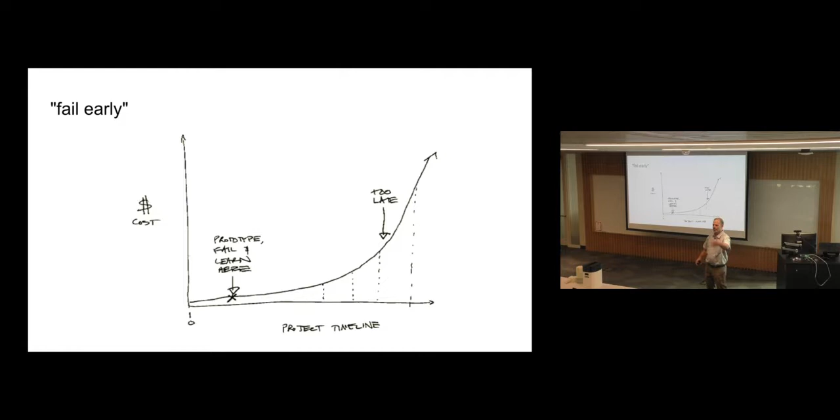It's much more fun to talk about things that don't work than things that do work, at least to begin with. But I don't want you to think that everything I do doesn't work. So I'm going to run through just the names, and you'll see the theme of these 4 companies that I've been involved with.

One of them, which I hope I'll get to a story from, is in the area of image-guided surgery. This was originally called Z-KAT, later Mako Surgical. The idea was how should surgeons and robots interact? Hopefully you'll see this theme over and over again - hopefully not by displacing the surgeon and making a robot surgeon, but rather by bringing the best of both to the activity.

That company was bought in an amazingly large purchase in 2013 by Stryker. Had I stayed involved with that company through thick and thin for like 10 years, I would be on my yacht right now. In fact, there were 5 co-founders of that company. One of them did make a lot of money, isn't on his yacht right now. I was talking to him in preparation for this talk, and he's now able to be his own angel investor. When he has an idea, he can just go do it.

So plenty of money, but only if you really stuck with it. The other 3 of these I did jointly mostly with Ed Colgate, an occasional other. He's the co-founder of the next 3 companies I'm going to tell you about.

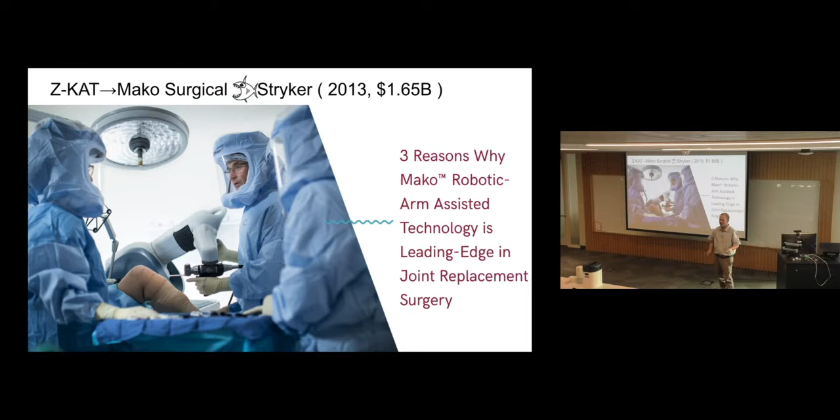Cobotics. Here the idea was similar to integrated surgery, but now it's in manufacturing and assembly, especially in automobile assembly, but other materials handling applications. What's the proper interaction between people and robots there? We found that the people you'd most expect to be fearful of robots, because the robot is supposed to take our job, were not fearful of these cobots, collaborative robots, because they understood the idea was to complement their abilities with robot abilities rather than to try to make autonomous robots that replace them.

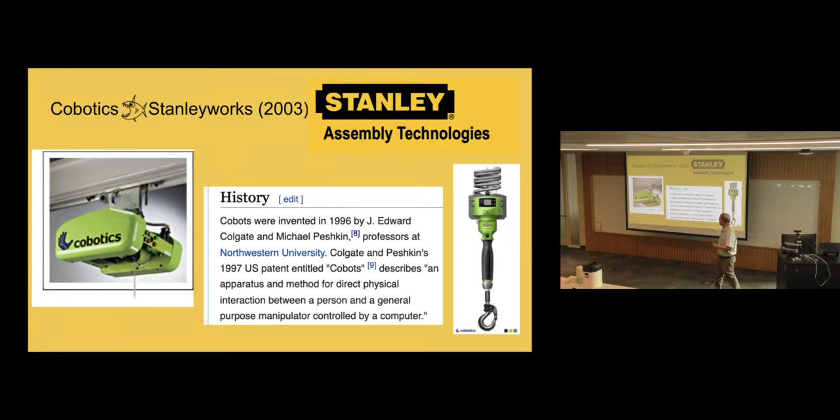Third, and I'll have a story from this one as well, Kinea Design, in the space of rehabilitation robotics. Again, there's a clinician working with a patient, and how do you combine robotics with the skills that a physical therapist brings to a patient rather than trying to do what the physical therapist does?

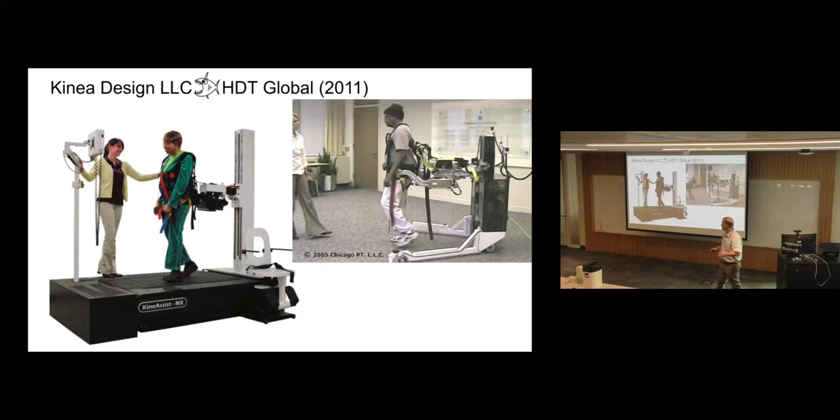Lastly, and this one is current, the only one that has not been gobbled up, is Tanvas. This is not about people and robots, but it still is the physical interaction of people and machines. In this case, how can you spend all day swiping touchscreens? Why can't you get anything back from that touchscreen besides an occasional buzz? Why can't you feel real textures and structures on that touchscreen?

So now I'm going to hand this over to David to introduce himself.

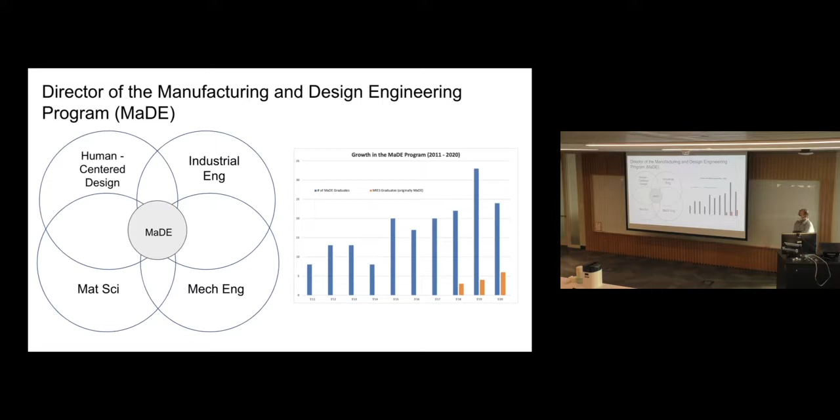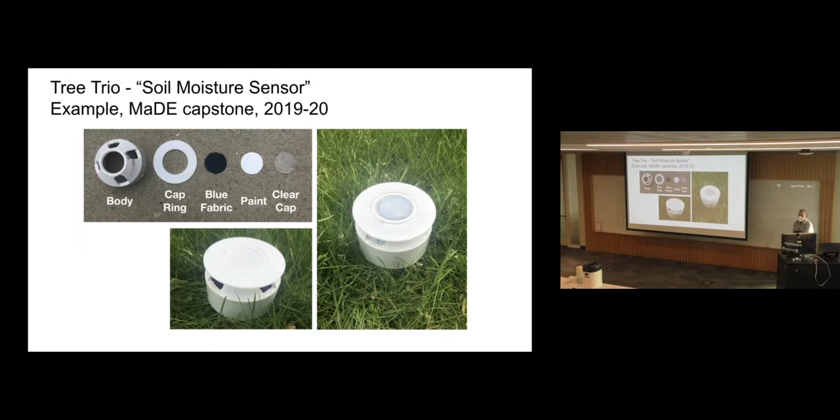This next one, actually I have a prototype, is a collapsible suitcase. What's really interesting about this project is that in working with my colleague and co-instructor, Professor Dan Brown, this team was not only able to create a collapsible suitcase, they were actually able to design the manufacturing process to make it cost-effective to manufacture in the United States, cheaper than making it in China, which was probably the major breakthrough of this project.

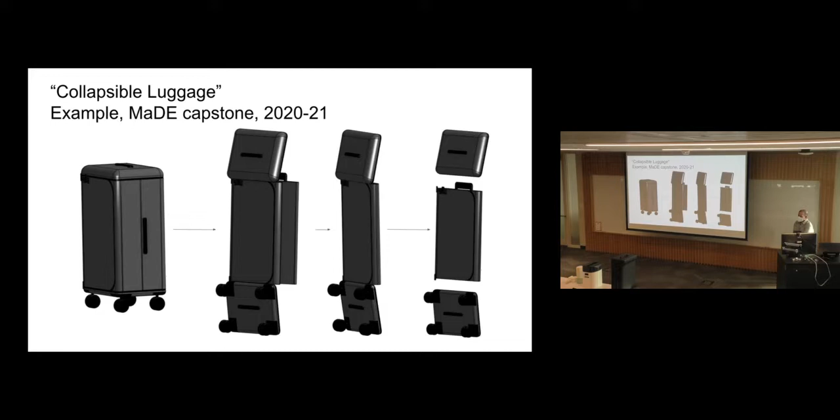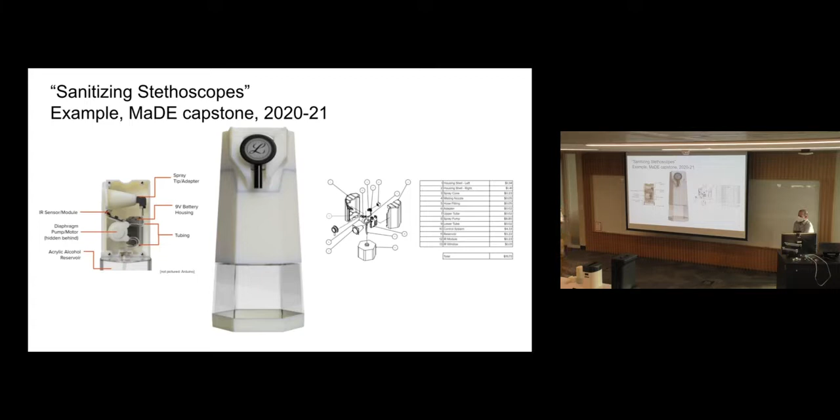Okay, so we're going to get started. As I said, it's design stories, and our intent is to share up to 4 stories. So let's get started on the first one.

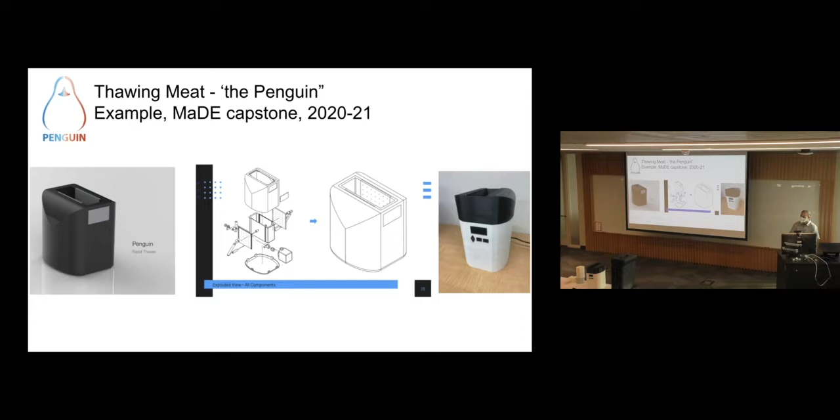All of us have probably experienced breaking a glass or two over our lives. I want you to think about the last time you did this. What problems did you experience as you tried to clean it up? I'll give you 10, 15 seconds to think about that, and I'd like to hear from the audience.

Very small pieces. Cutting the trash bag. Your hands got bloody.

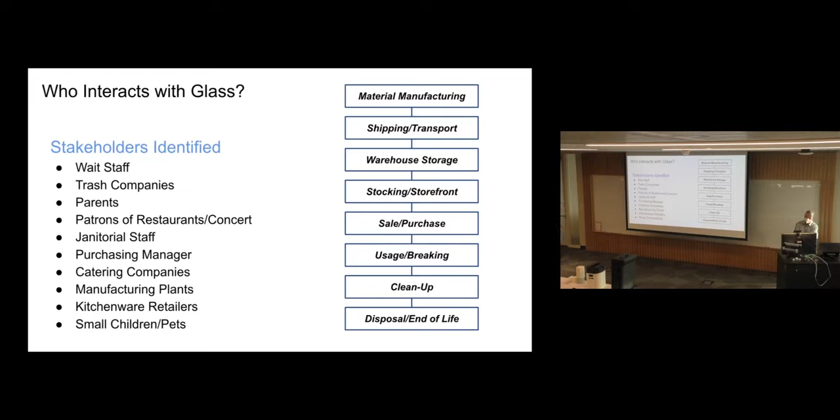Using the consumption chain, they were able to explore the needs of not only people who are cleaning up broken glass in the home, but people that actually manufacture glass, people that might ship glass, and they identified a whole bunch of needs. Through that, what they determined is that there are 4 functional needs that everybody has.

Those come down to identifying the glass, removing the glass, verifying that you've picked up all the shards, and then disposing of those pieces. And we heard a little bit about those needs as you guys volunteered your thoughts.

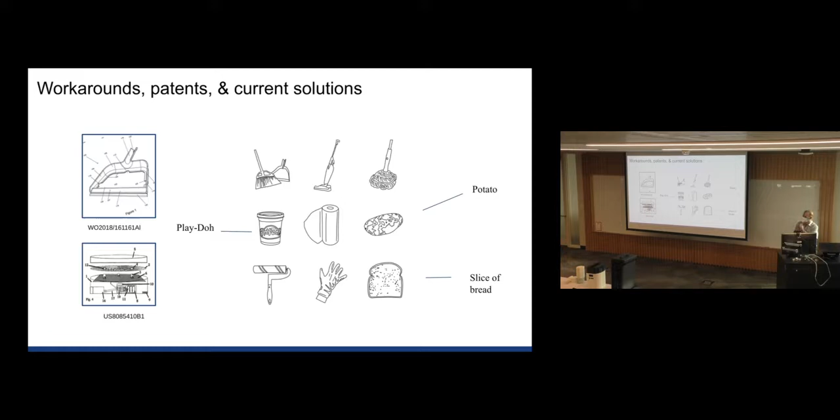They also identified that there are a whole bunch of workarounds and current solutions, including some unexpected ones, like using a potato cut in half, or a slice of bread, or even a can of Play-Doh. So what do you think they did?

They had to do some benchmarking. They had to understand how these workarounds work, what their strengths are, and what are their weaknesses. And so they'd identified a bunch of different environments in which glass is used and in which it's broken, and the different types of glass that can be broken.

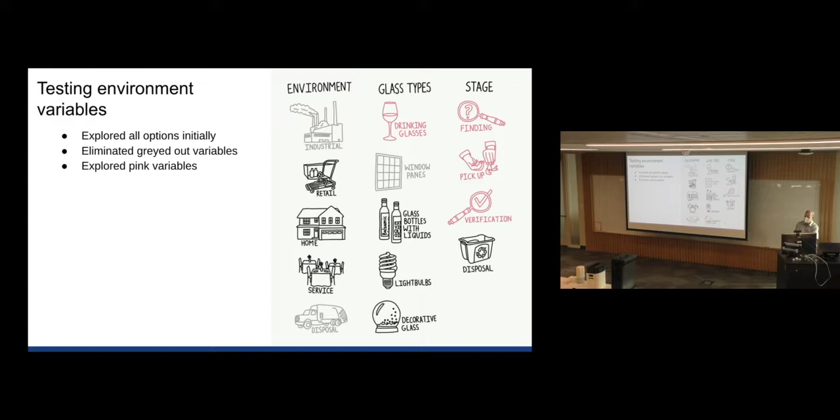And what they decided to do is what we often tell students to do: bring focus to your problem. And that's what's been highlighted in pink.

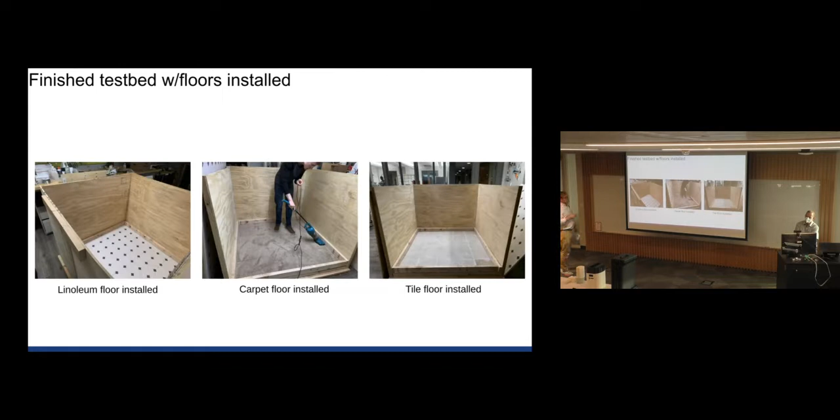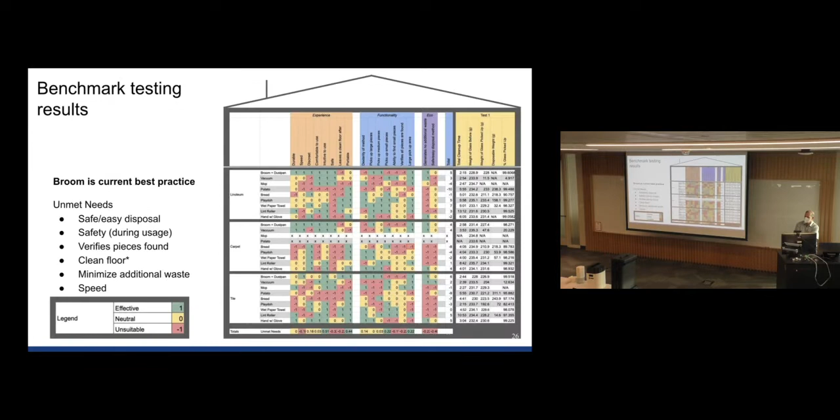They created a test bed in the sub-basement of Ford in the old EDI studio, and they were able to interchange the floors. Through their benchmarking, they tested 9 different cleanup methods on these different floor surfaces against these needs. And they created this impressive benchmarking matrix.

From that, they were able to determine that different methods do very well with different sized pieces of glass. They also determined that the ability to see the glass is a key differentiator.

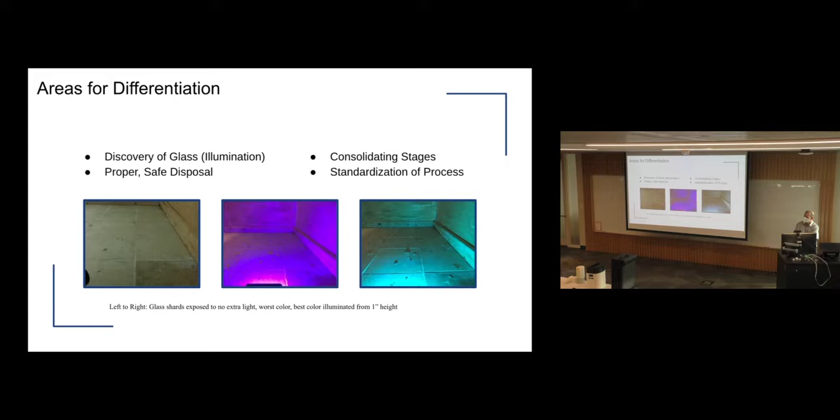That's often one of the reasons, Tino, you said that. You've got to be able to find the glass. So their final problem statement was to create a comprehensive solution that addressed these functional needs.

They brainstormed a whole bunch of different ideas. They did some early stage mock-ups. They tested promising features on those mock-ups. And then they did a series of iterations through off-the-shelf solutions and then CAD designs that they were able to 3D print.

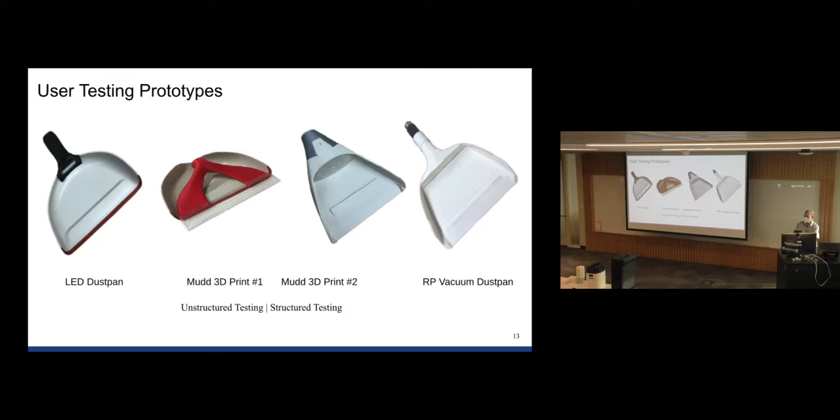By the end of the second quarter, they had this works-like prototype, which encompasses a dustpan with a vacuum with a glass catcher on the back end of that vacuum head.

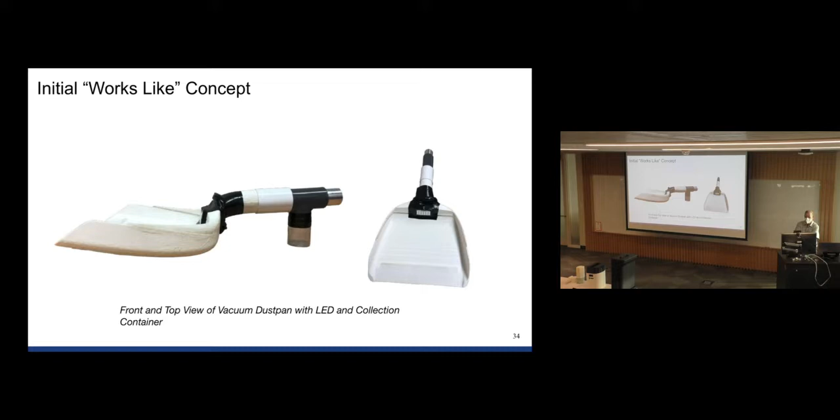One of the things that I said was a differentiator was the use of light. So an LED exploration was necessary. They looked at different wavelengths of light, used different types of LEDs, and used different types of filters. You can see here some of their exploration.

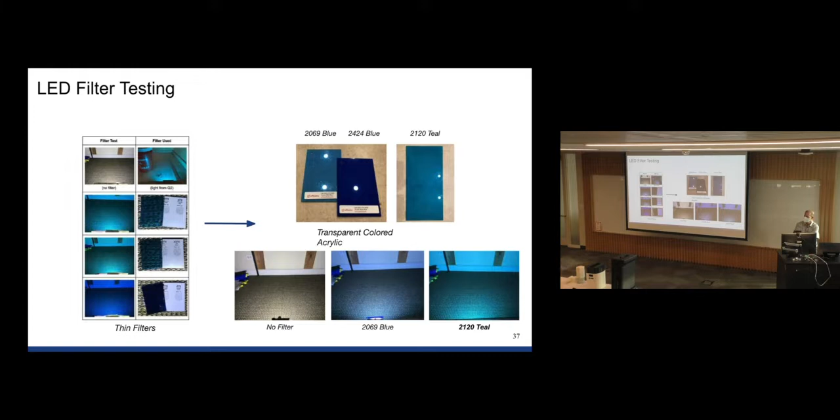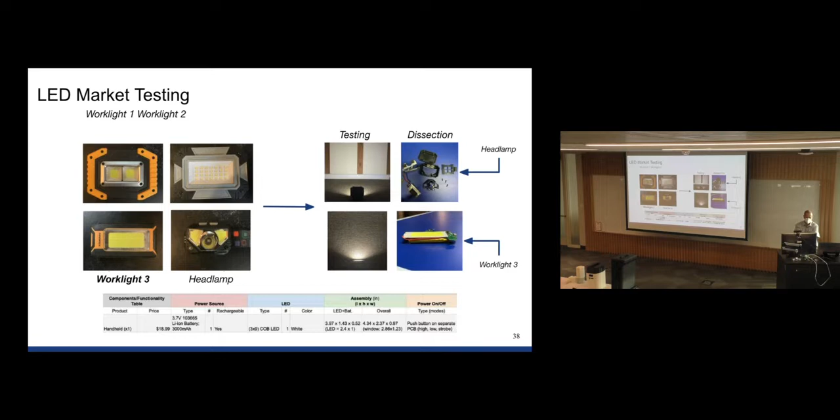They ended up doing some product dissections to see if they could actually use off-the-shelf solutions to make their prototyping process easier. They determined that a COB LED was actually used in some of these high-intensity lights, and they were able to get the form factor right so they could fit it into their prototype.

The last quarter, this team—and this is kind of foreshadowing for the MAID students—really focused on design for assembly and design for manufacturing. That's where a lot of the technical work ended up playing out in this class.

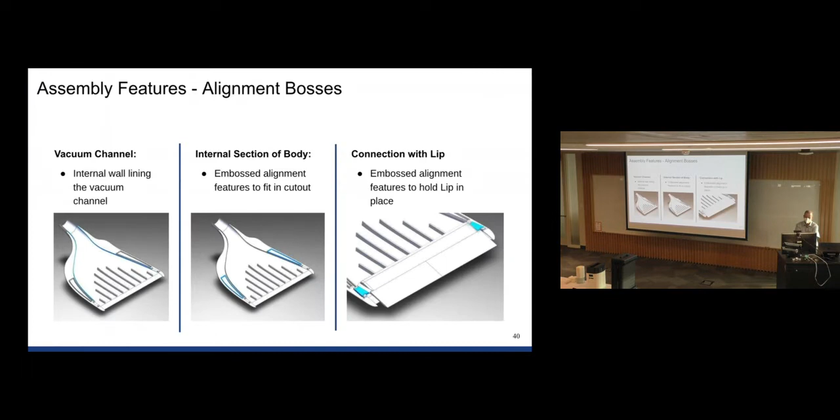So they looked at different features that would allow this product to come together, like alignment bosses and press fits. They determined that a living hinge would allow the top and bottom to come together.

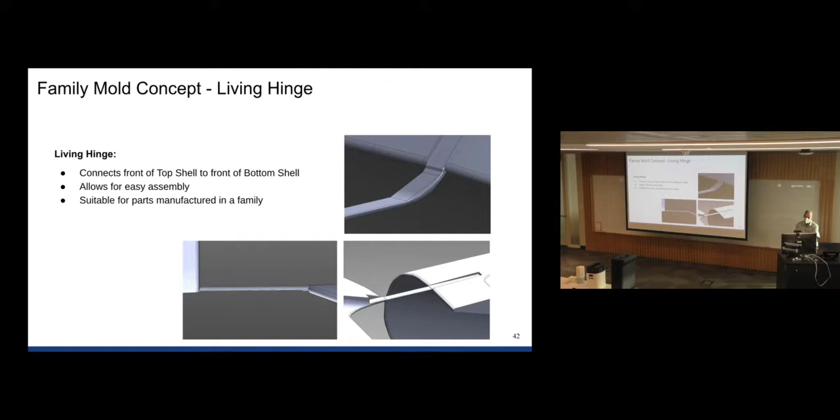And there's more about that when we start talking about manufacturing considerations. They looked at different types of fasteners to allow these pieces to come together.

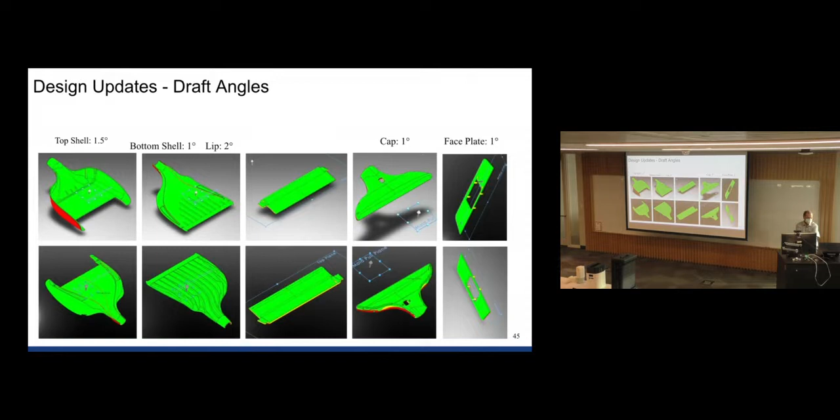On the manufacturing considerations, a lot of those pieces you just saw could be injection molded. They worked with a local injection molding company to co-design their solution so it could be injection molded in a cost-effective way, and one of the students, Lucas Pagni, actually took it upon himself to use SolidWorks Plastics to do some of the simulations.

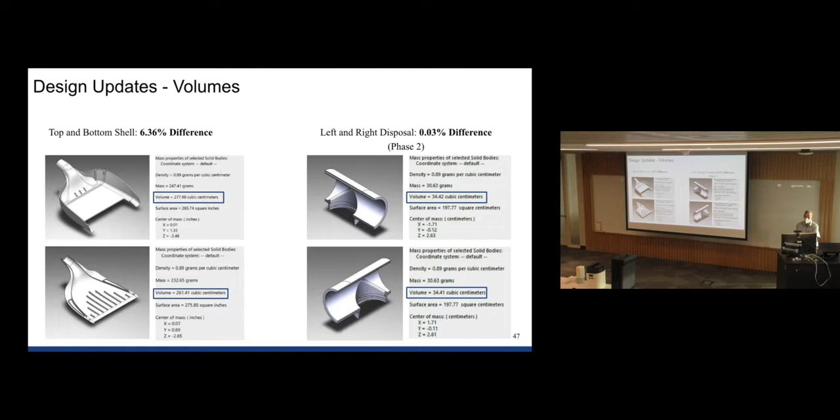He did these simulations so that he could understand how long it would take for that plastic to cool, what the flow patterns would be, and what the impacts are of different dimensioning. By the time he got done, he was able to come up with some very informed cost per part projections.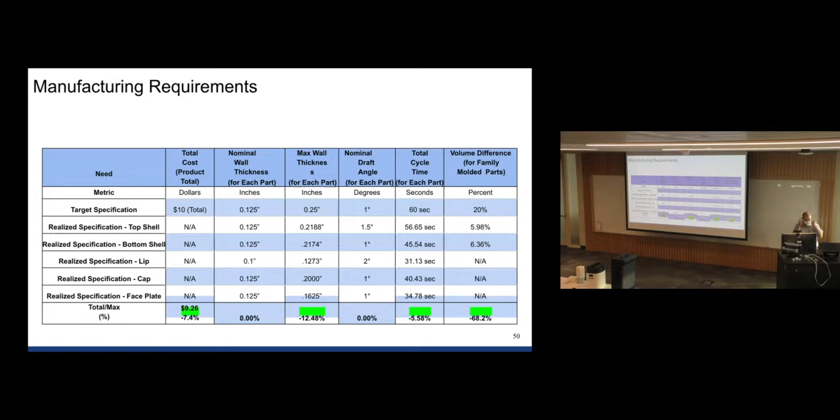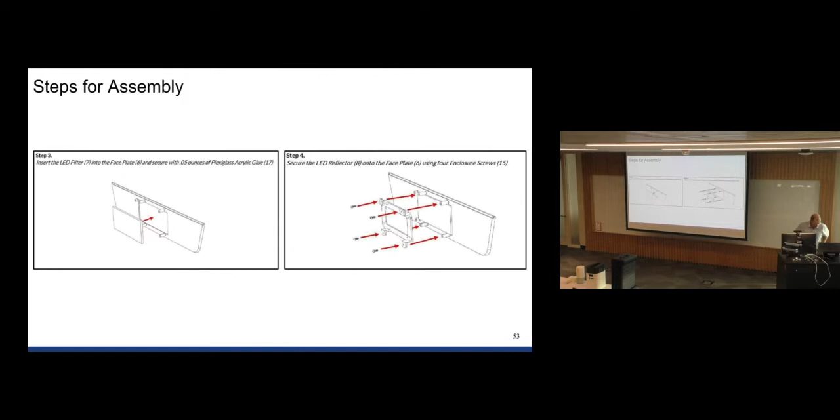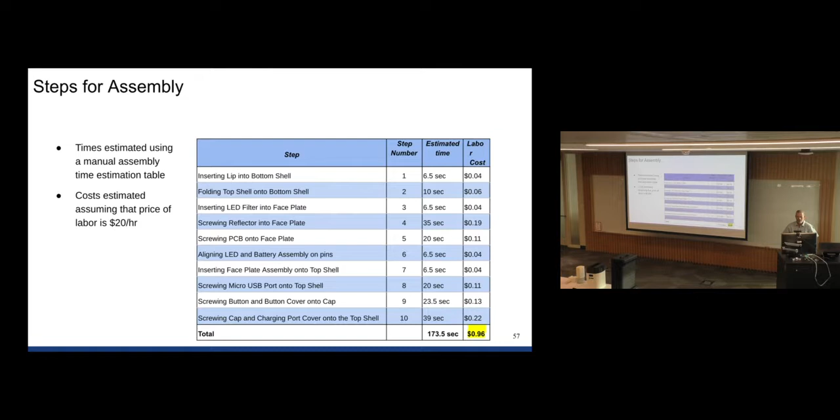So they did a similar analysis for their assembly costs. Here you see instructions for putting together all of these different components. They did time value studies so they could estimate the cost per part of assembling this in a factory, and it came out to about 96 cents.

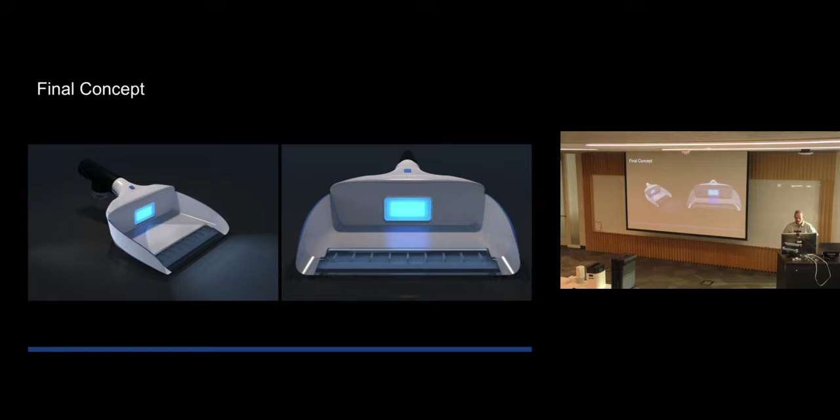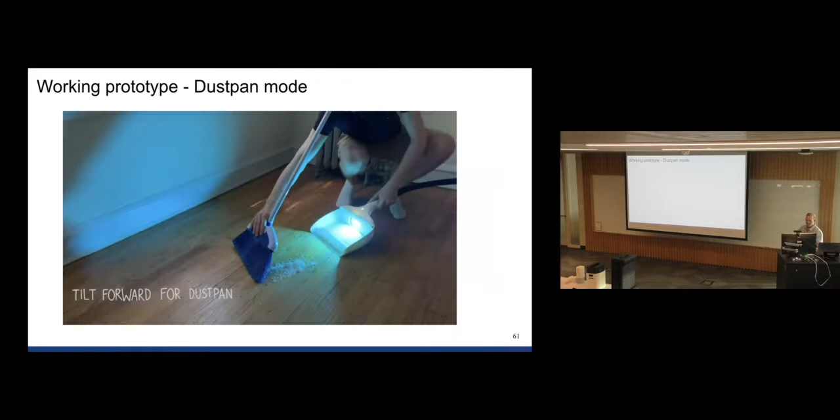The last thing I'll say is that it was actually entered into the Dyson design competition. And if you look at the most recent Dyson vacuums, the cordless ones, they integrate a blue LED into their vacuum, so I find that kind of interesting. Right, thank you.

Thanks, David. What I love about that story is how the students started out in our needs-finding and design process that we teach here, and before long they're lost in mold flow, cooling rates, and design for assembly. They moved from conceptual design into technical design, into engineering design. That's beautiful to me.

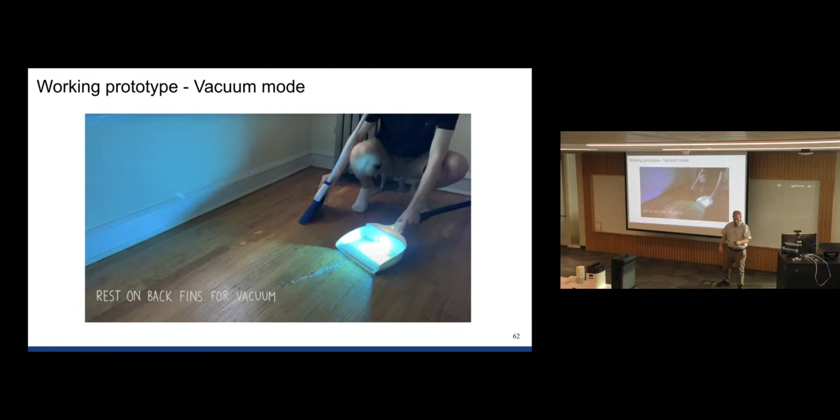Okay, so whoops, you forgot to mention your team there. All right, we'll have to come back to them.

This is the Kinea Design company that I told you about to begin with. We had the unusual opportunity to do this with Ed Colgate and a professor in physical therapy as well—a kind of blue sky design. The charge was to see if there is any role for robots helping physical therapists. All we really knew was we weren't going to try to build a robot physical therapist—that wasn't the concept.

So, of course, the first thing we did was a whole bunch of observations. This is a typical physical therapy gym, and you don't see a lot of robots there. In fact, you don't see a motor there, or really hardly anything that qualifies as a machine, except in the most basic sense—like something with a lever or a wheel.

I'm going to talk about the team, but that's all you're going to see of them for now—I'm coming back to them. Team is, of course, important; that's part of my talk, what I'm trying to say. We'll come back to them.

Here's what we saw in some of our observations that suggested there might be opportunities for powered machines. A couple of things we saw were stretching exercises and range of motion exercises, which typically involve large forces, small clinicians, and large patients. You can think about what some of the issues or needs might be there. Also gait training—this is kind of an extreme example, trying to learn to navigate stairs. You can see what the clinician is doing and struggling with, and that's a small patient. Most patients are much bigger than that.

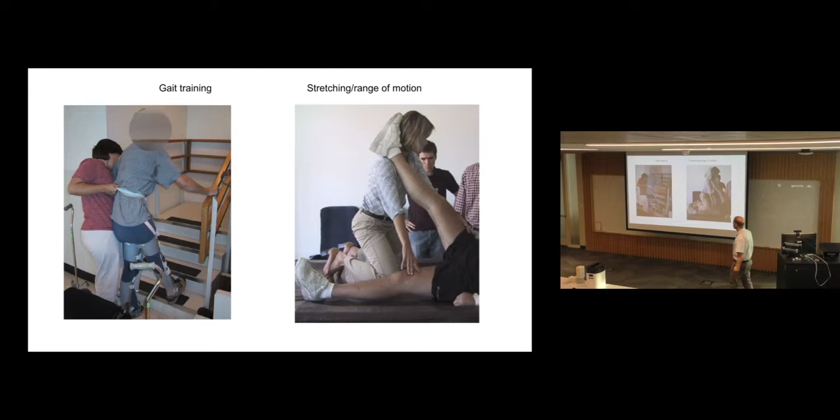So those inspired us a little bit—let's see if we could come up with some concepts for how we might use robotics technologies to assist in those things. And so, what do you know, brainstorming—coming up with ideas for how to unweight people's legs so they can better work on the motion of their legs, without putting so much of their body weight on them. So body weight support, and we'll look at this more later, but you can see there are lots of wild ideas here, many of which we actually explored at some depth.

Having chosen a few possible directions, I'm going to illustrate some ones that did not turn out to be where we went. So in a minute, I'll tell you what these are, and then I'm going to ask you, unfairly in a certain way, to tell me what might be wrong with those directions.

Bicycle exercise devices are popular in rehabilitation, and this is a simplest possible works-like prototype to check out that idea with users, with us, with experts. Bicycle upside down, and what's this thing?

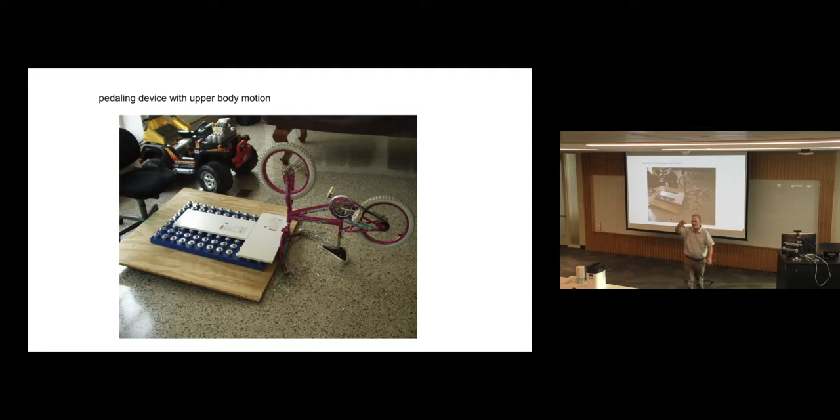The addition here is that you should have some upper body motion, that controlling the motion of your upper body should be a feature of doing this exercise in a way it doesn't usually get to be. This thing is a board full of rollers so that your back can squiggle around on it as you attempt to bicycle. Okay, that was one concept.

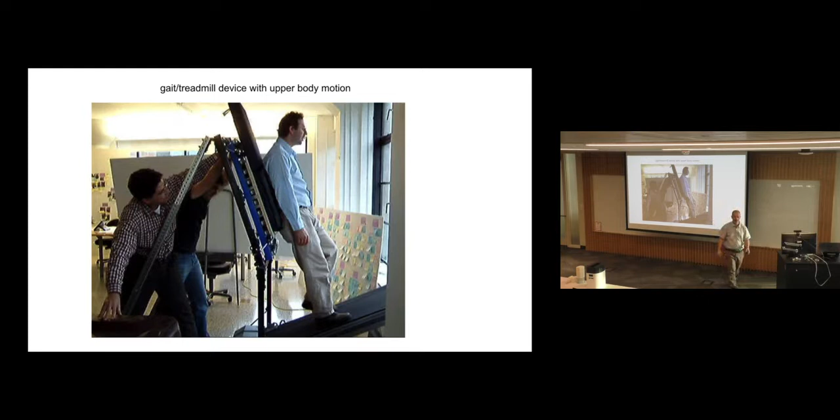Here was a third concept we went into, called the physiatrist's workbench. This is for those stretches and range of motion exercises that I showed you required such large forces. The idea would be sort of a versatile bed-like structure with movable parts, but also with some, robotically—it's not a robot at this point—some powered arms that could, in a very controlled, slow, measured way, apply those stretching forces to limbs.

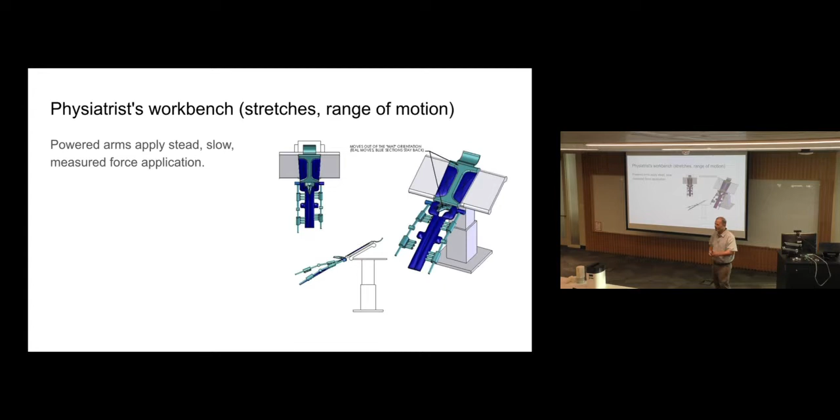Okay, so that was three concepts, all of which we rejected. And I'm going to ask you this unfair question, because you've all tried to pick up broken glass—that's a fair question. But you haven't probably been in physical therapy or know much about it. Nevertheless, I'm going to ask: what criticisms might you have of the directions, not necessarily the specific devices, but the directions we've chosen to go here? Anybody? Yes?

Okay, so even getting into a cycling device could be a challenge.

You should have been on our team. We could have saved some time.

Others? Yes? I think in general, these solutions lack reliable feedback. But I also think the one on the left specifically—I'd be worried that when someone is trying to use it, they might push with their legs instead of being able to reliably pedal, especially if they're not used to using their legs, then they might end up pushing themselves backwards.

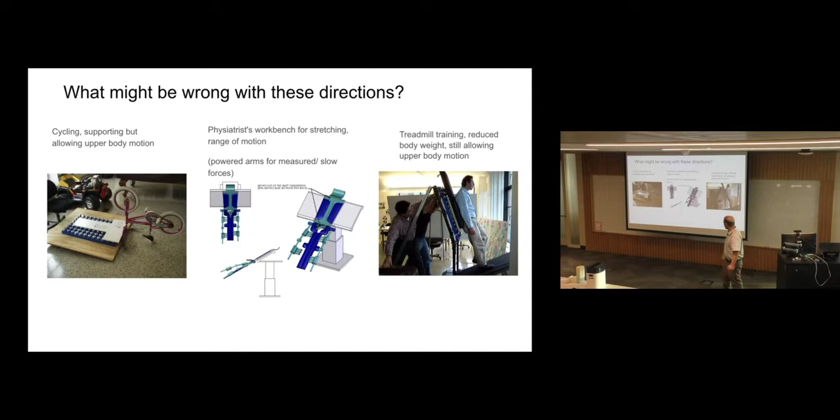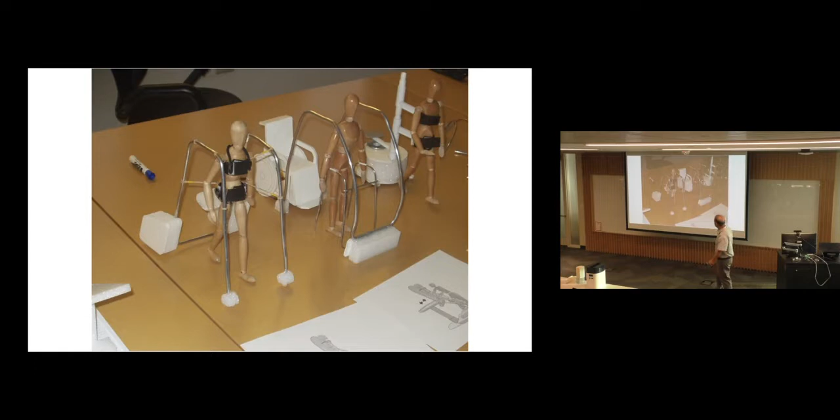Okay, so we rejected these and went on to something a little more flexible. Here are some mock-ups you'll recognize from our process too—little mock-ups of ideas for how somebody could walk with some body weight support, unweighting their legs, but with greater upper body motion available. Part of the building, prototyping, trying: here's a quick prototype for how we can support somebody's upper body so they can still move freely, but we won't let them fall over or go too far.

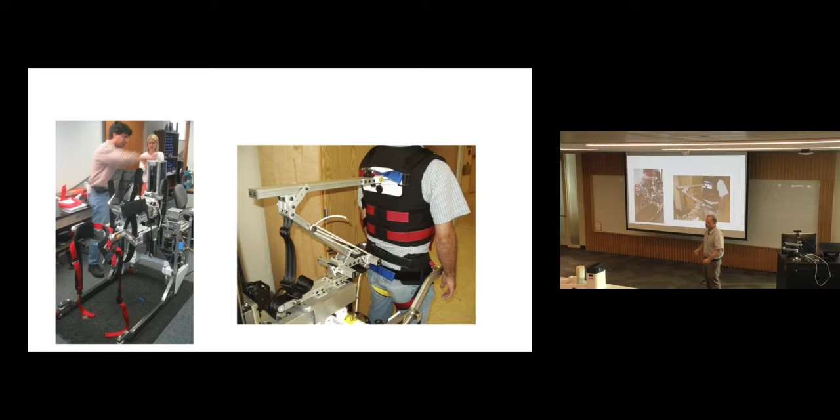As this became more and more sophisticated, it became really a robotic device, designed to go over ground so you could actually wander around the halls, walking with this thing holding you up somewhat at the hips, letting your body move so you can work on balance. The idea was that the physical therapist—this is not a patient, this is an engineer—could actually do things with you that they'd never be able to do safely if they were responsible for holding you up. It would hold you there, maybe unweighting you, and if you fell over, it would catch you. So they could give you a shove, make you reach for a ball, do all sorts of challenging things, and the machine's job was to hold you up and catch you if you fell. So that became a device.

Now, I promised I'd go back to the team. I want to talk about teams a little—who do you want on your team? First, I have to warn you, if you ask me who should be on your team, you're going to find out what you need is a whole bunch of college professors on your team. That's an artifact of it being me, right? So I'm going to ignore the college professors here, of which there are too many.

So there are people on a design team—this is not all of them, but it's most of them. Some of them are domain experts, like Ela Lewis, who is a practicing clinician, a practicing physical therapist. Some of them are process and industrial design and psychology experts, like Amy Schwartz, who was at IDEO at the time and is now here.

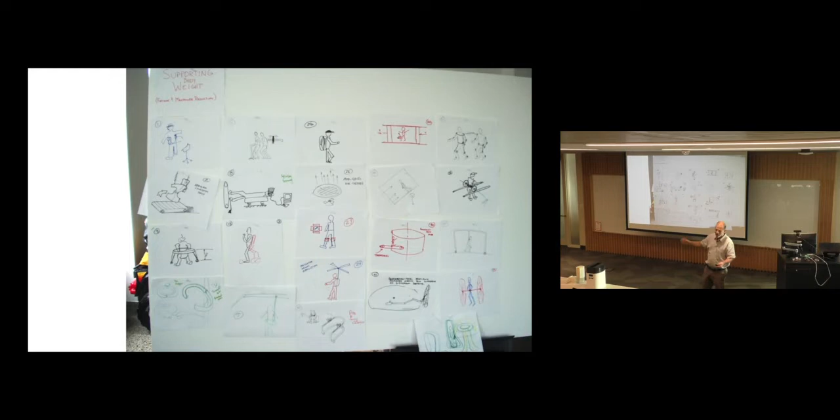Like, can those people who are really immersed in their discipline and really expert at what they do, can they think out of the box and brainstorm wildly and interact with people well? Look, one of our pictures here of how to hold people up had helicopter blades. I don't think that was that useful, but there was no problem thinking out of the box, right? People are way out of the box.

No problem with that. And so my takeaway from this is wizard level engineering skills, learn design process and teamwork, and that's what makes you the most valuable engineer on a team.

Okay, I think I'm handing this over to you. I think you are too. All right, thank you.

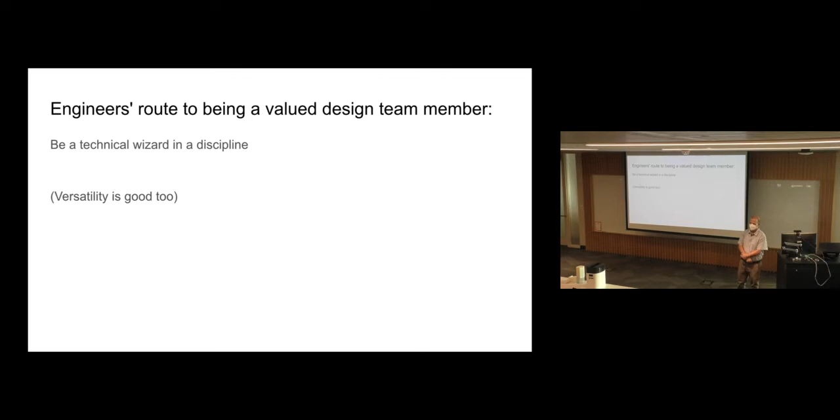So I want to complement what Professor Peshkin just said. I think in addition to the technical wizardry is the resourcefulness, particularly among undergraduates in design classes. And so the next story we're going to talk about is an example of students reaching out when they didn't know something and being guided by someone with that technical wizardry, which they could then take home after that experience. So we're going to talk about a fish story.

So, who likes to fish? Just show of hands. I like to fish. Not too many fish? Okay.

Anyone use lures when they fish? Okay, pretty much everybody. What kind of hooks do lures use? Go ahead, Claire. Say again, barbed? Okay, single hooks? Treble hooks? Liam? Say again? Sharp? Yep, very sharp. Go ahead. I can't hear you. Okay.

Okay, well, I often fish with something called a jitterbug. Anybody know what these hooks are called? They're called treble hooks, and if you have experience with treble hooks, there are quite a few problems with them. Anybody guess what might be problematic about a treble hook?

If you're actually lucky enough to catch a fish, it's really hard to get out because oftentimes you'll have the whole fishing rod all around everything. Okay, very good, and they're barbed as well, which makes it complex. Kane, same thing? Any other potential problems? Well, in our research and in my personal experience, those hooks tend to snag things you don't want them to snag. They'll snag the bottom, they'll snag the grasses, they'll snag logs, they'll snag branches, they'll snag the outside of the fish, and if you're unlucky, they'll snag you.

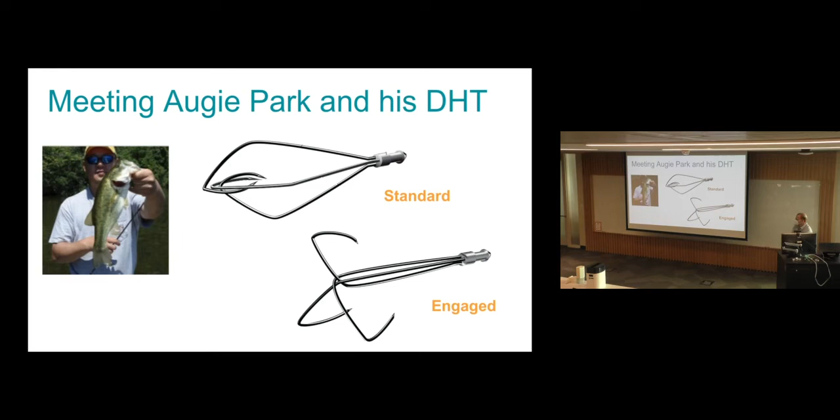Right, so we did reach out to fish hook manufacturers. Fish hook manufacturers want to have nothing to do with you. They have people knocking on their door every day saying come look at my fish hook. Another thing the students discovered is you might want to research how fish hooks are manufactured. There's nothing in the literature—they're all trade secrets. So we ended up having to reverse engineer a fish hook.

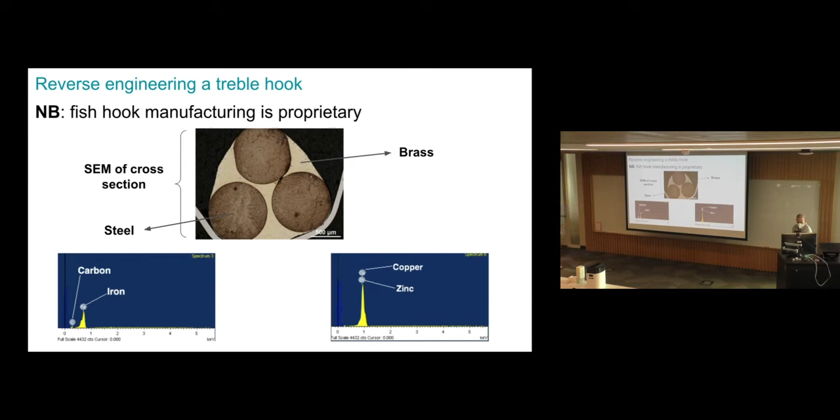So we took the Eagle Claw Trokar, which was the number one fish hook in the market, and we took a very thin cross-sectional slice. Through scanning electron microscopy we determined we were looking at steel for the hooks and brass for the cement, a process called brazing, to hold those hooks together.

So there you have it, again this is all in Mr. Park's head—the standard or relaxed position in the top left, the engaged on the bottom right. What's happening to those wires, and is there a way that we can model what's happening to those wires? Claire?

Right, so the intent here—turns out a largemouth bass is a suction feeder. It sucks it in and then it comes down. The intent is there's a load applied inward on all of those, which allows these hooks to go from being buried to being exposed. If I were to model that, is there anything you know from your experience in McCormick that could get you started?

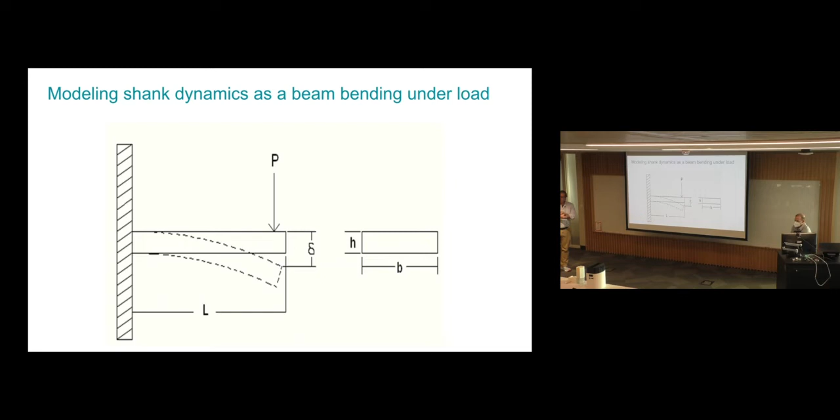Well, what if I looked at this as simply a beam under load, and bending? EA2, Civil Engineering 216—there's an application for that knowledge. Through this you can understand the travel, the amount of force needed, and maybe what the dimensions need to be. This led to an exploration of lengths and cross sections, where we ended up finding a sweet spot between the compliance and the stress the hook needed to experience—really helpful for wire selection and the length the wires needed to be.

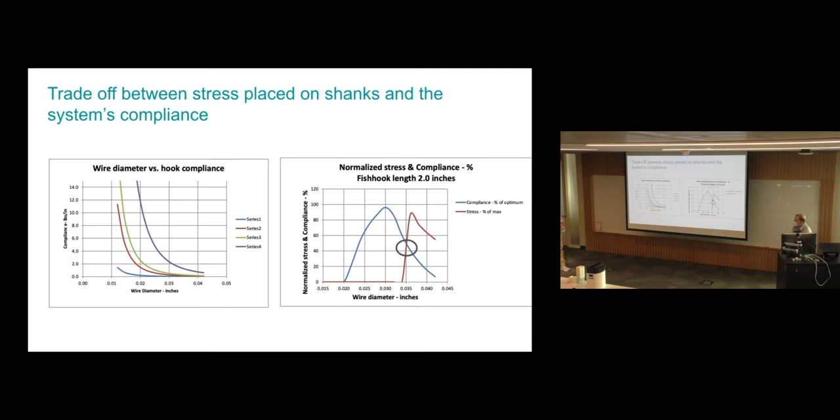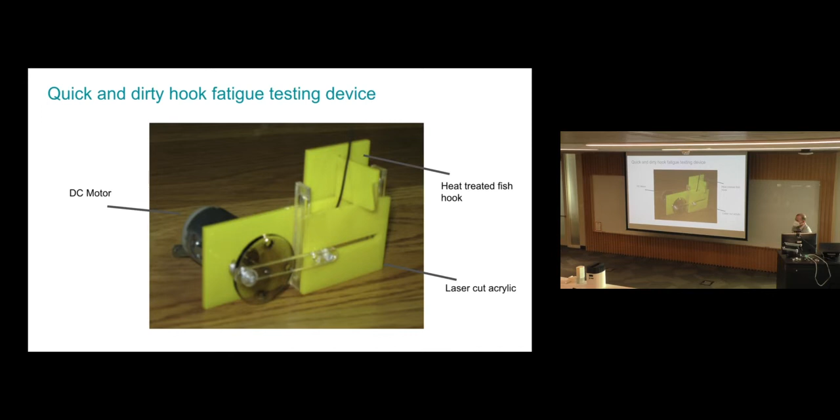The last thing I want to talk about with this project is the idea that if you're using wires and want to manipulate them—Kane, you had a good workaround using off-the-shelf stuff—the team reached out to a metallurgy professor, and his recommendation was: here's a bundle of piano wire, and you need to heat treat it. So one of the students took this bundle of piano wire home, put it on his gas range, heat treated it, and brought it to class the next day—and it was brittle like pasta. His words were literally, 'I think the professor was playing a joke on us. There's no way this is going to work.'

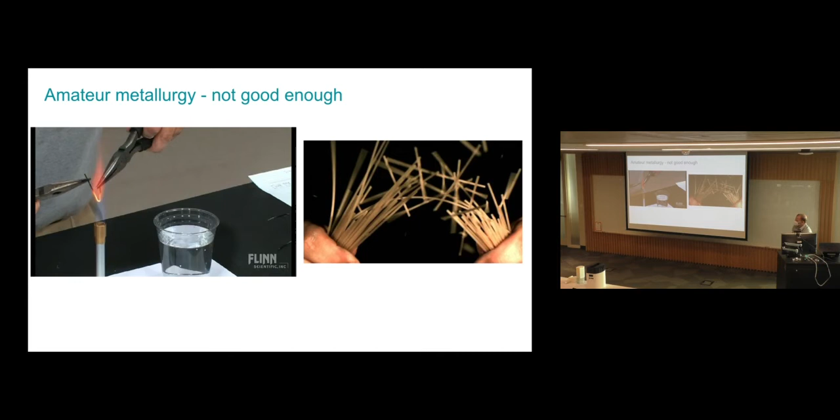Well, we didn't give up. We ended up going in and looking at the phase diagram for steel and understanding that heat treating has a great big space.

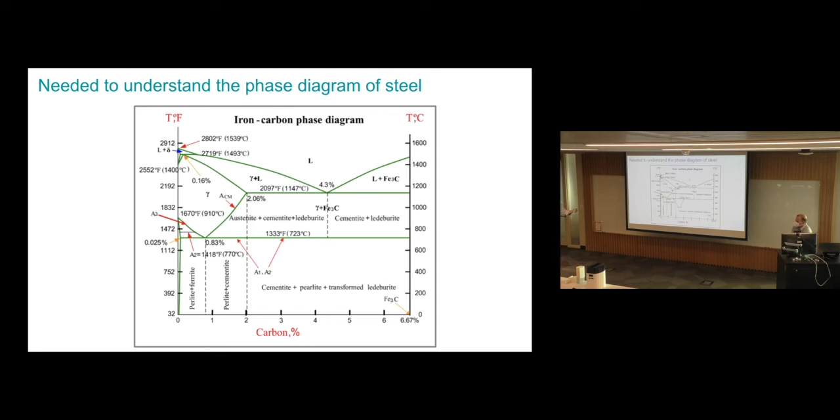What we ended up having to do is first normalize the wire. Normalization means you take that wire and move it up to the austenitic phase, which in this case is above 1100 degrees Fahrenheit for over 48 hours. That increases the ductility of the wire, so you can do anything you want with it. And that's what we did.

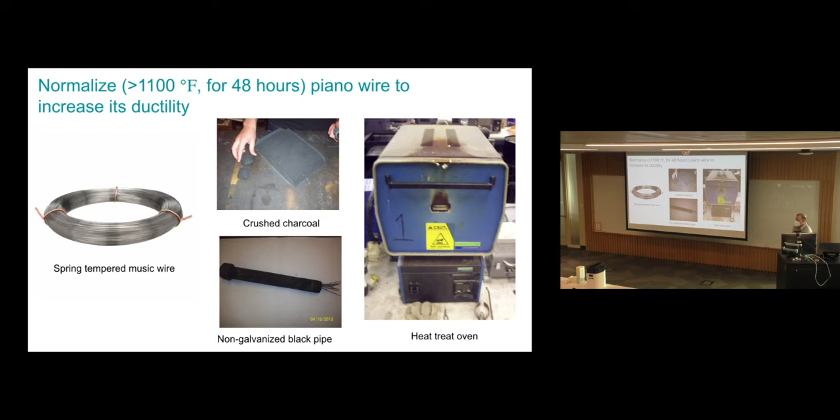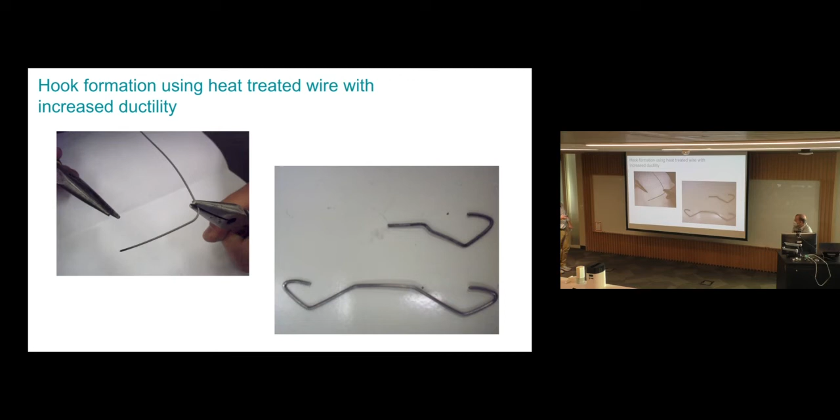Once it had been heat treated that way, you can see us forming it, and you can see we could do whatever we wanted shape-wise. But those wires are not strong. You need to go through tempering to do that, which in this case was somewhere around 500 degrees for less time. That allowed us to create some of these crude mock-ups you see here.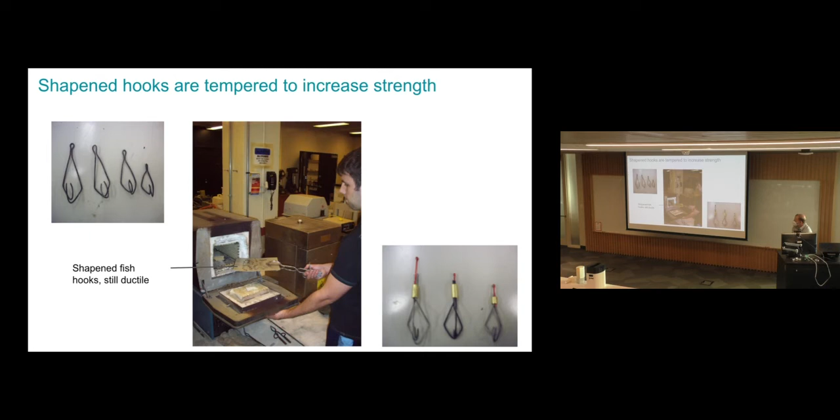What I want you to take home from this is that this team knew nothing about metallurgy when they started out. But by the end, they had a great appreciation for phase diagrams, which you often learn in materials science and thermodynamics but never do anything with, and for the meaningful application of that science.

Thank you. So yeah, they really went deep, way beyond anything they might have done in their classes, I feel sure.

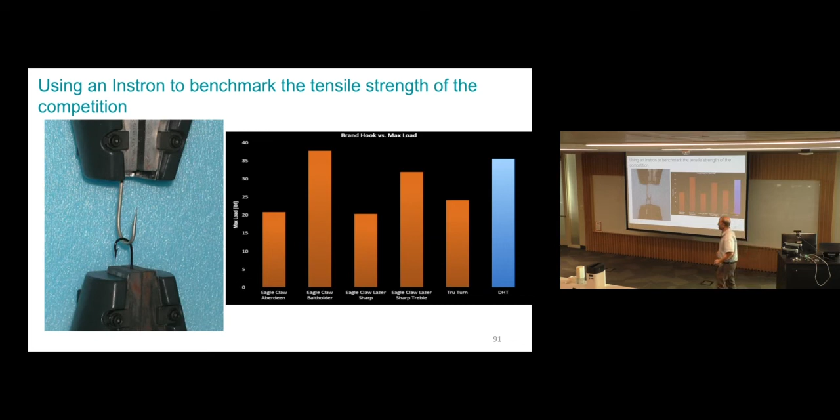Okay, so it's getting late, and I want to have a few minutes for open conversation. So I'm going to really abbreviate this. This is the story of image-guided surgery that I promised at the beginning, and I'm just going to show you the beginning and the end.

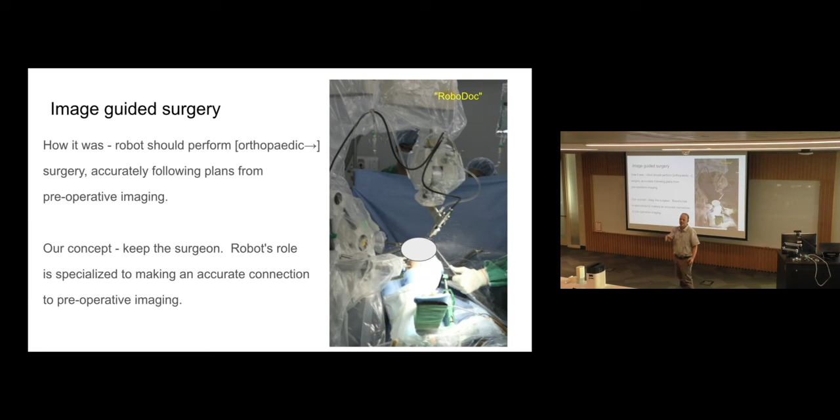At that time, the objective seemed to be, especially orthopedic surgery seemed like a good target, and why not just make a robot do this stuff right? Never mind the surgeon with their chisel or drill or mill. So our concept was: keep the surgeon, and use the robot basically to bring imaging information from a CAT scan so that the surgeon could execute it, registered to the anatomy just the right way. And so there's our team.

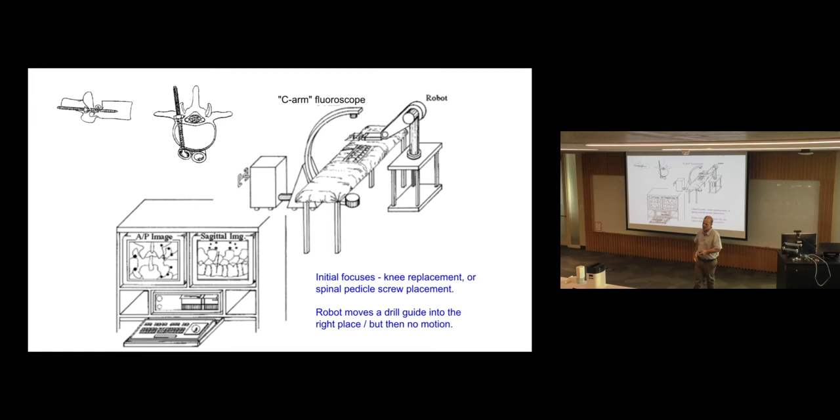I'll come back to them in a second. The concept had to do with using fluoroscopy, called a C-arm fluoroscope, to take a couple of images of what was originally spine surgery, choose where to insert, in this case, a hole for spinal fixation, and we later moved to knees.

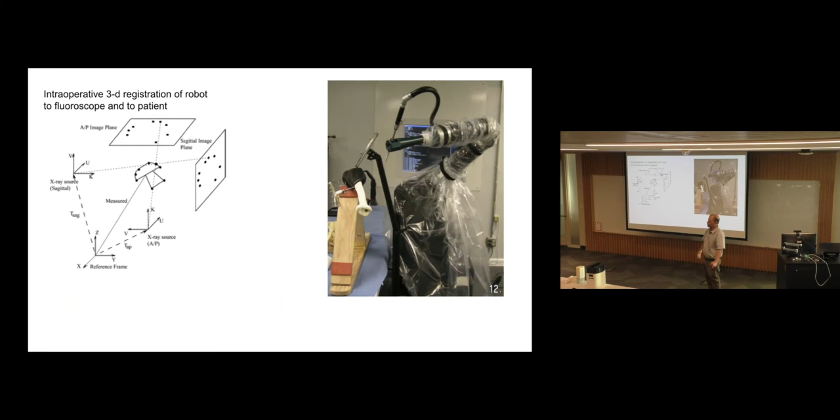I just wanted to highlight a few people. Arthur Quaid did some of the robot calibration. He was a student here in mechanical engineering. Another student did fluoroscope linearization - how do you register these things to each other? And we came up with a system.

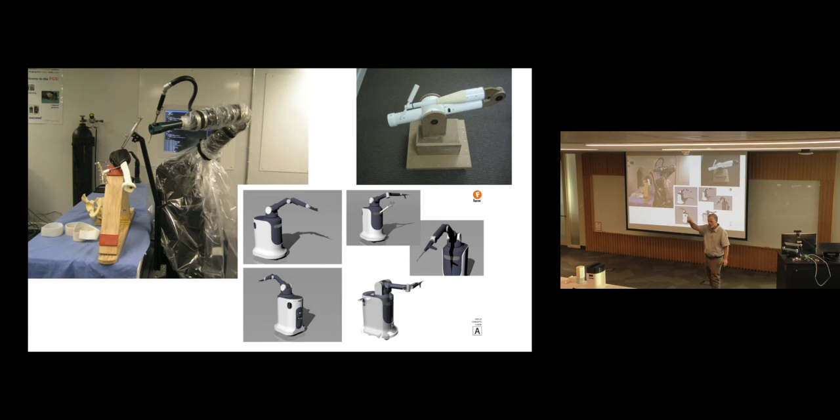But what actually went into play in the end was a knee surgery, knee sculpting for a knee replacement surgery system. There it was a robot-held burr, something that could grind away bone, but with surfaces defined in software. The surgeon was controlling it, the robot was constraining where the cuts went. That's kind of all I want to say about it. So keyhole bone sculpting became the Mako Rio system, which was acquired by Stryker.

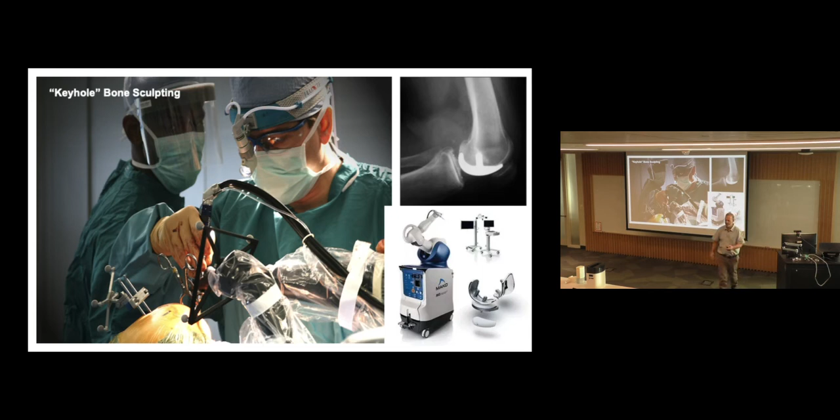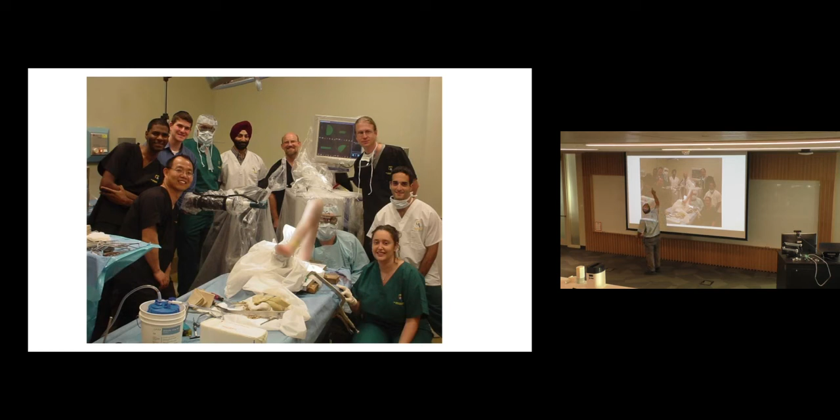Team members, I'll just point out a few: Hyosig in software, Dennis in software. These people are mostly software, mechanical engineer. I was talking to the guy who doesn't have the yacht, and he was just pointing out these extraordinary engineers who were part of the team there. Okay, so that's enough.

Let's talk about, well, anything - design teams, the relationship between design thinking and design engineering and just technical engineering. Thoughts for anybody? Yeah, so if we're talking about the story you just told and then Bishop's story, learning about metallurgy from scratch is impressive, but that's also one thing compared to having to apply your engineering to something like e-surgery.

Yeah, that's really interesting. So there are going to be compartmentalizations, right, inevitably. And if you're really a valuable compartmentalized wizard, you are also arguably a very valuable design team, brainstorm, that kind of a thinker as well.